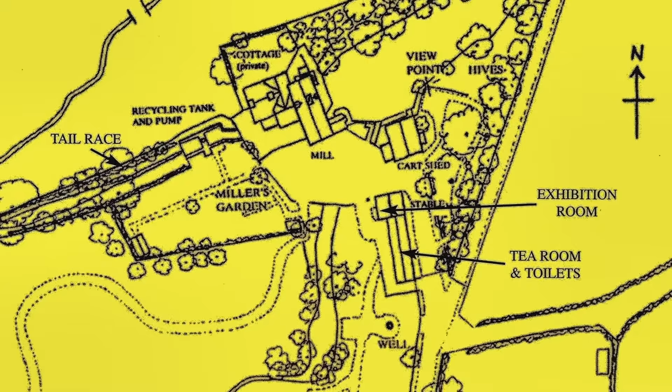New Hall Water Mill is situated in Sutton Coldfield, at the southern end of New Hall Valley, through which runs the stream now called Plantsbrook, formerly known as Ebrook. The mill pond was originally fed by this brook, but a continuous water supply was cut off in the 1960s, and the pond is now topped up using a holding tank.

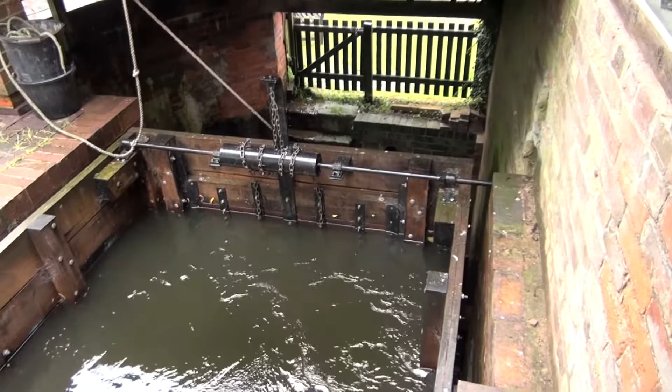The water from the pond enters a wooden pentrough before falling on the water wheel. The height of the sluice gate determines the amount of water that flows over the wheel and hence its speed. It is regulated by an interesting chain mechanism controlled from inside the mill. Here we can see where the axle enters the building, attached to a very simple but effective lever, which, when turned, raises or lowers the sluice gate.

Any excess water in the pond falls over a weir and returns through a tunnel to Plantsbrook. Looking over the railings in front of the water wheel housing, you can see the water coming under the sluice gate and falling on the wheel.

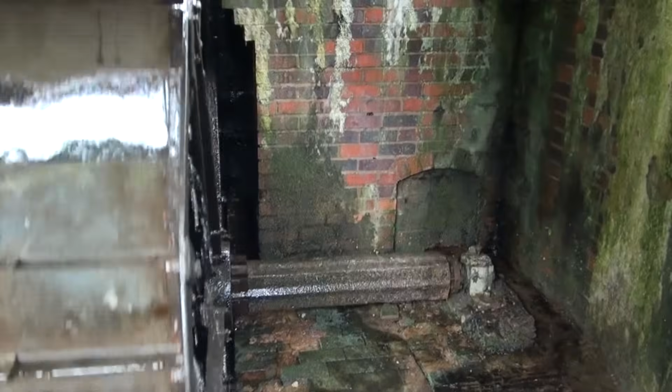As we enter the mill, we are greeted by a confusing array of rotating wheels and belts.

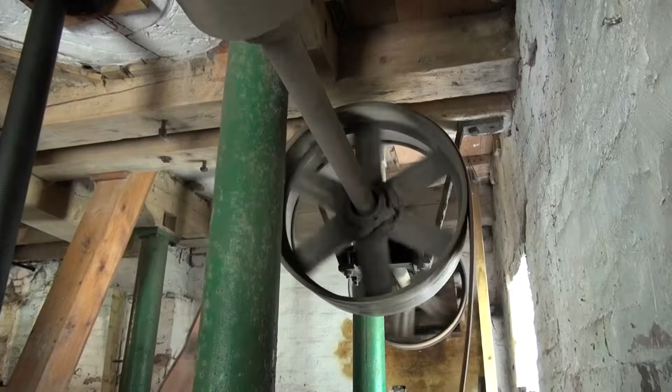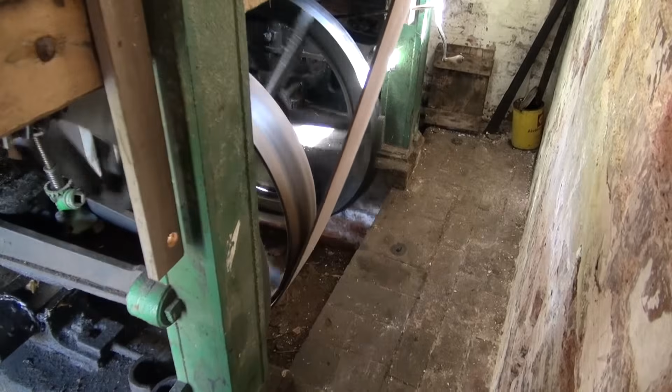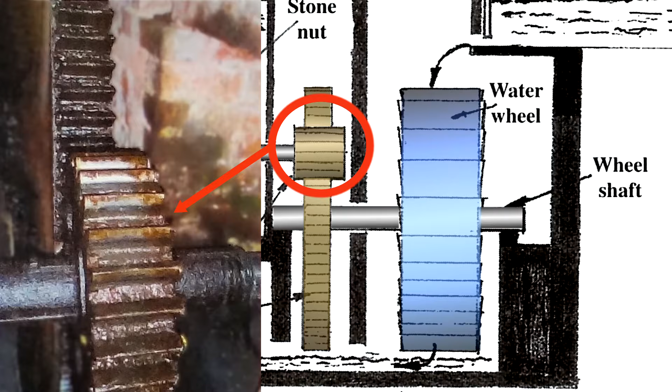Our first step in understanding how everything works lies in that opening on the left, where you can just see a moving gear wheel. This is where the shaft of the water wheel enters the building and is attached to the huge gear wheel called the pit wheel. The pit wheel engages with a smaller gear called a wallower, which is attached to the main axle in the building. Here you can see it rotating and turning the main axle.

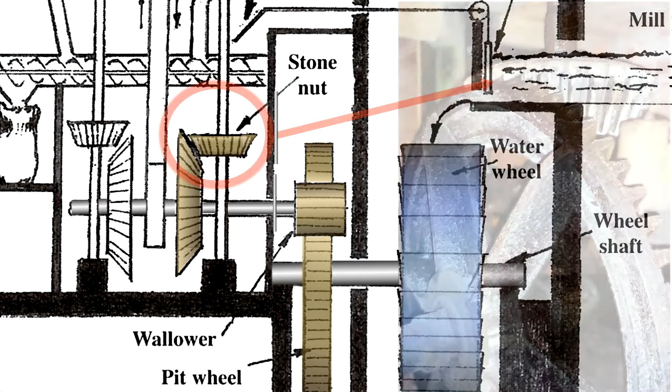In order to rotate the horizontal millstones, the power must be transferred to a vertical shaft. This is done using two beveled gears at right angles. The one in use can just be seen at the back.

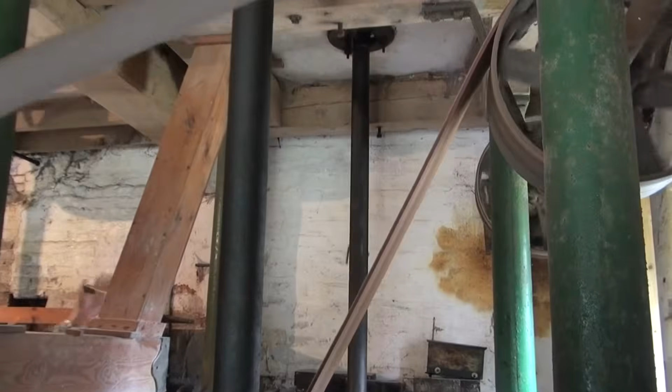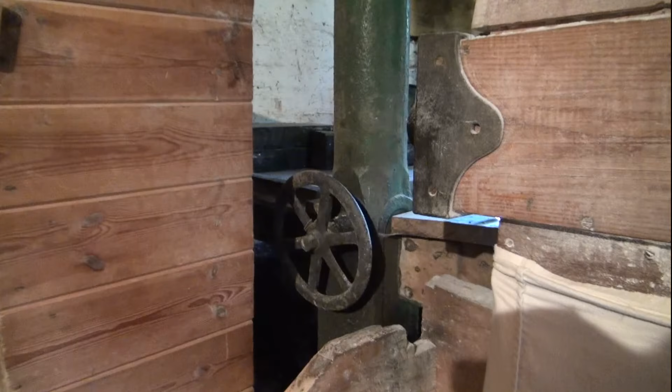There above is the vertical shaft that turns the millstones. It's got a piece of straw tied to it. That hand wheel is important and will be dealt with later.

But first we will turn our attention to the wooden chute down which the flour descends from the floor above. Behind it you can see a black rotating shaft which turns the millstone. You can see both of these on this diagram. The chute is in brown and the rotating shaft supporting the runner stone is in red.

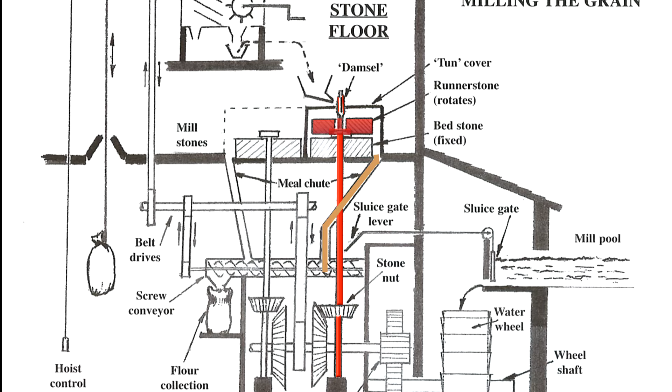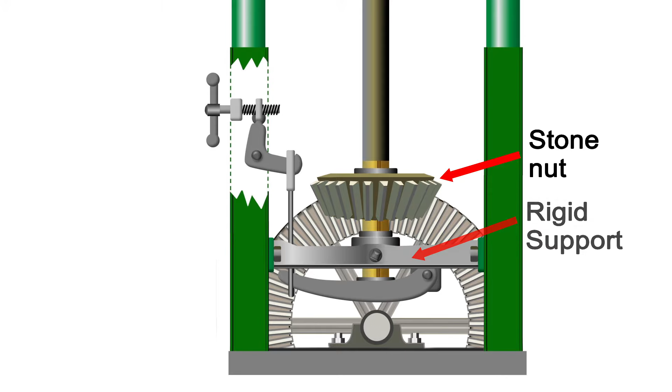That rotating shaft must be moved up or down in order to maintain the correct gap between the millstones. This is done using a mechanism called the tentering gear. The rigid support of the mechanism is situated below the beveled gear wheel, which is called the stone nut. The stone nut is on the rotating shaft that turns the millstone.

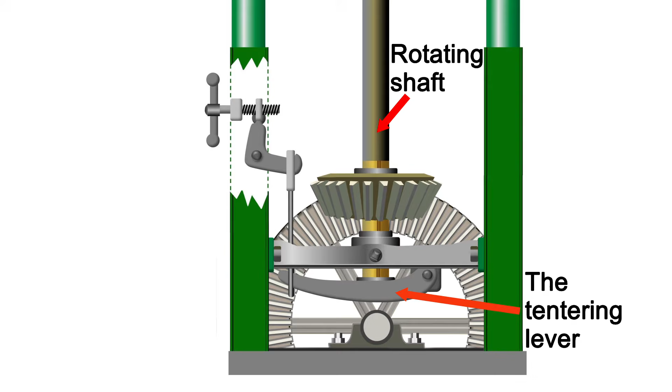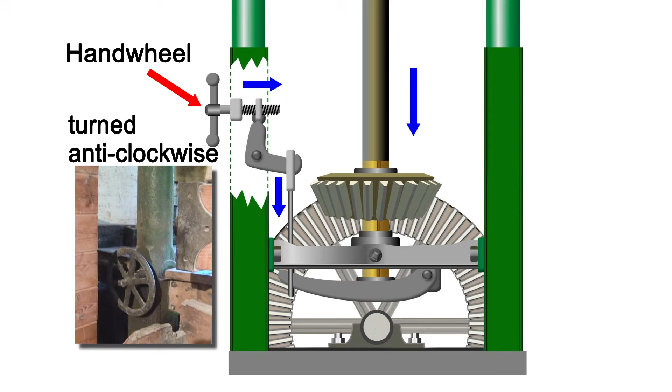The tentering lever below the support carries the whole weight of the millstone and the shaft. Rotating the hand wheel clockwise raises the lever and the shaft and so increases the gap between the millstones. As the millstones wear, the wheel must be turned the other way in order to maintain the right gap. The tentering gear that we can see is the one not being used.

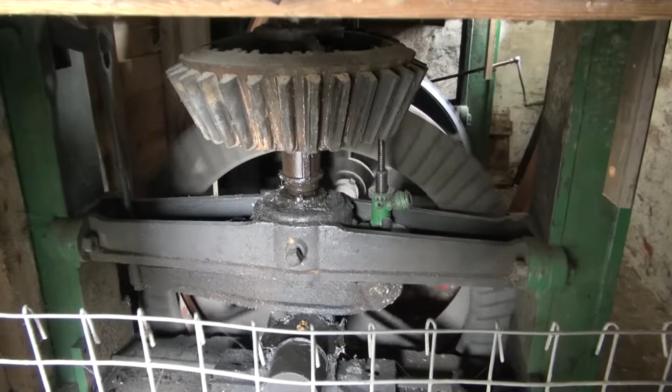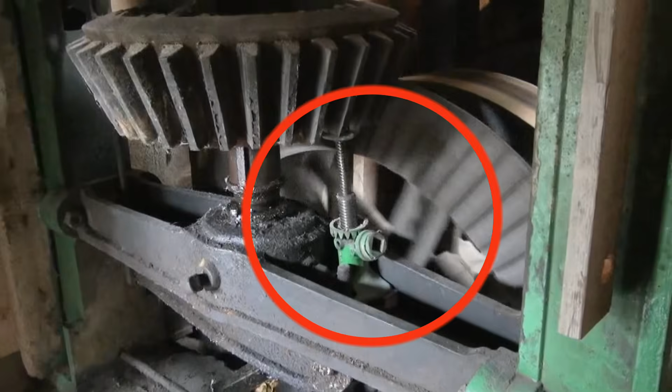If the shaft is raised a lot, the cogs will disengage. This mechanism, similar to a car jack, allows the cog to be moved up or down the shaft as required to maintain proper contact. In this picture you can see the link joining the lever to the wheel mechanism.

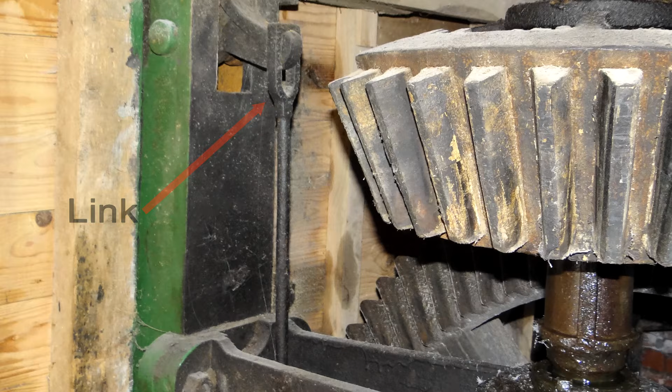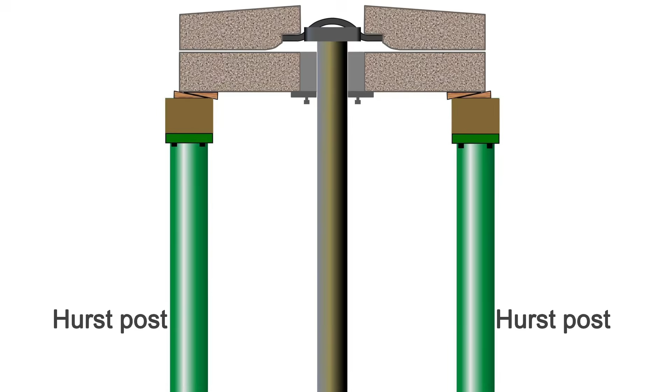We have looked at the ground floor. Now we must go to the floor above and look at the millstones. The Hurst posts support the fixed bedstone.

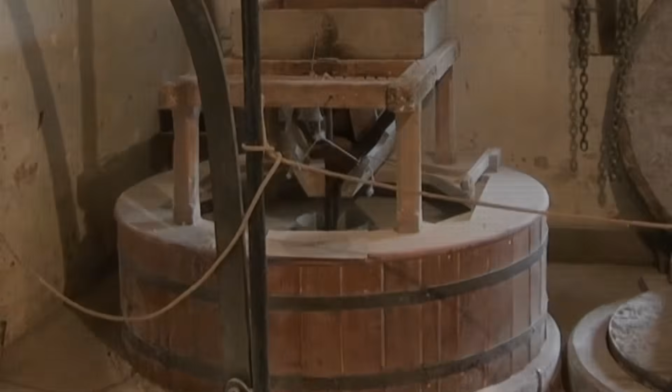The upper one is called the runner stone and rests on a piece of iron called a rind. This in turn is attached to the mace, which is attached to the rotating shaft. They are all enclosed in a wooden box called a tun. We shall return to the milling process later.

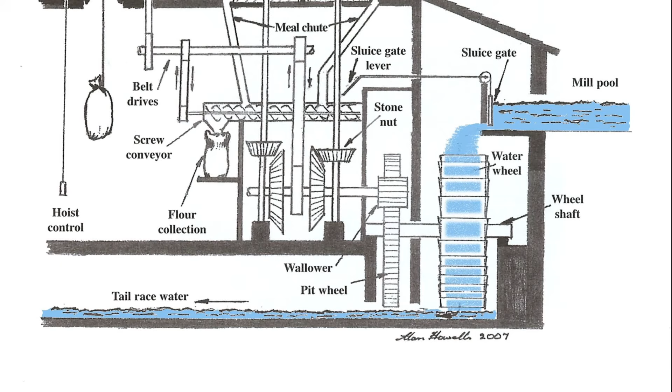First we will go outside and see how the mill pond is kept topped up. The water that comes from the water wheel enters the tail race and travels under the buildings to the holding tank. When the holding tank reaches a certain level, a powerful electric pump is activated automatically. This quickly empties the holding tank and returns the water to the mill pond.

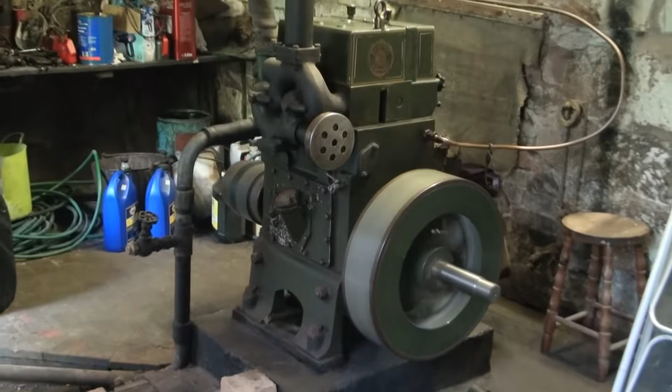The water wheel is not the only source of power. When the water supply became unreliable, the miller, Ben Davis, installed a diesel engine in 1949. The diesel engine runs two machines at the back of the building, a combined milling machine and the mechanism for the sack hoist. Let's follow the belts to the milling machine.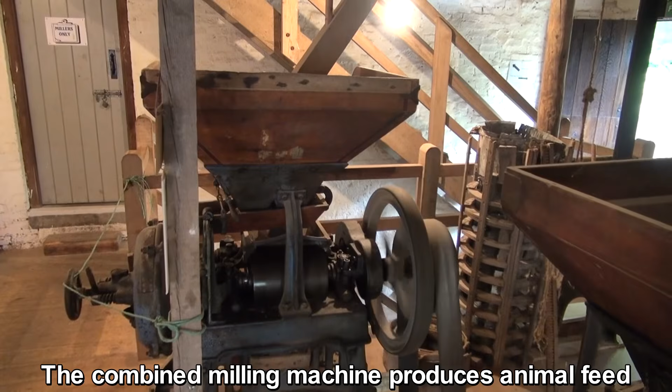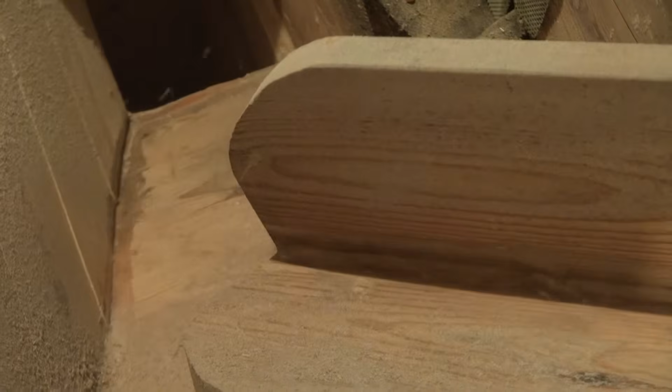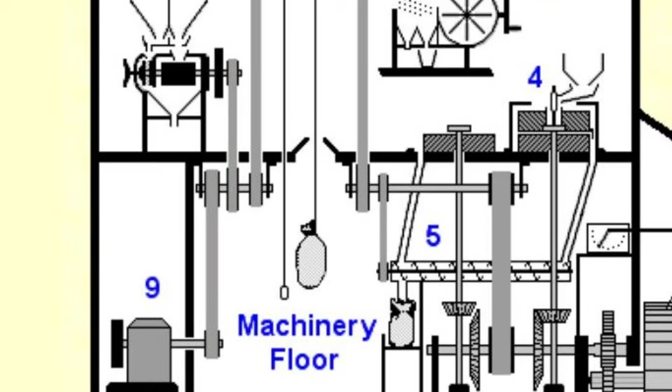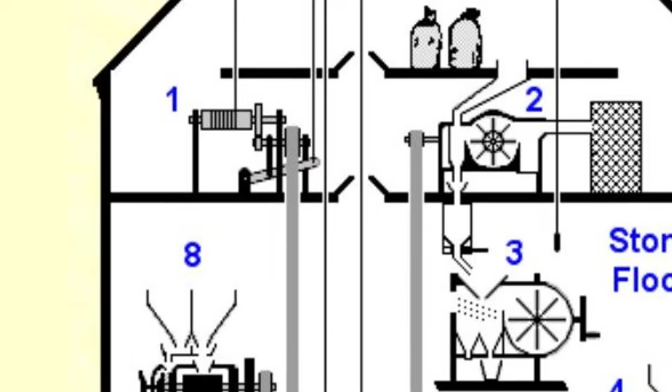We have seen how the diesel engine drives the milling machine, and now we look at the sack hoist. The mechanism is situated at the top of the building just below the garner floor. The grain arrives in heavy bags on the ground floor and must be lifted to the top floor where it would be stored. It will be hoisted up through a series of trapdoors.

The miller, working on his own, would count the number of clonks as the traps closed in order to tell when the load had reached the top. The hoist is controlled by a rope pull.

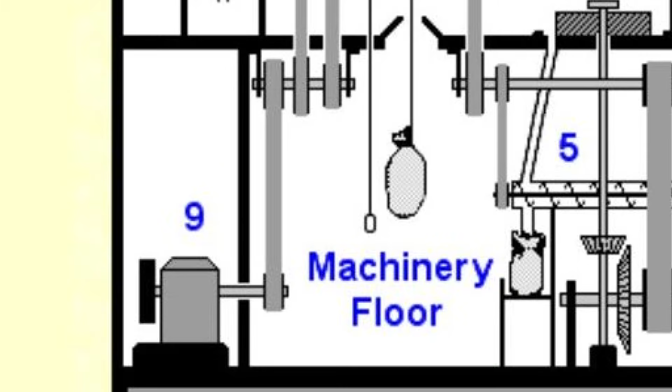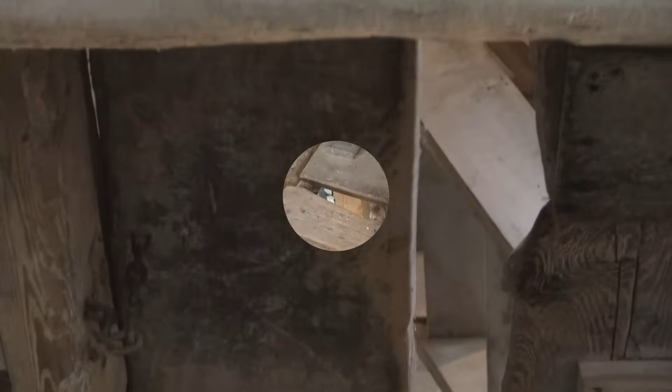The journey would start on the ground floor. Up there is the first trapdoor. The rope pull goes right up to the top floor. This is the first trapdoor from above, and there is the rope pull beside it.

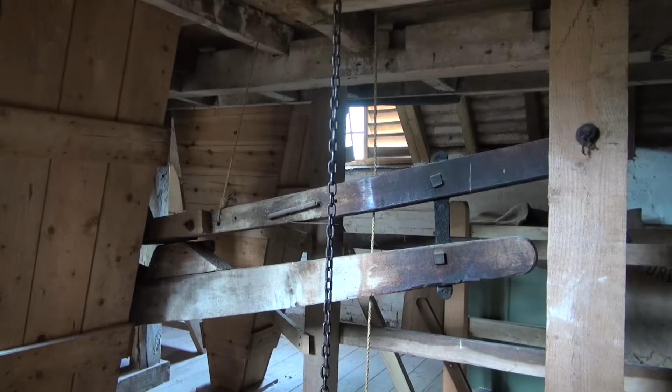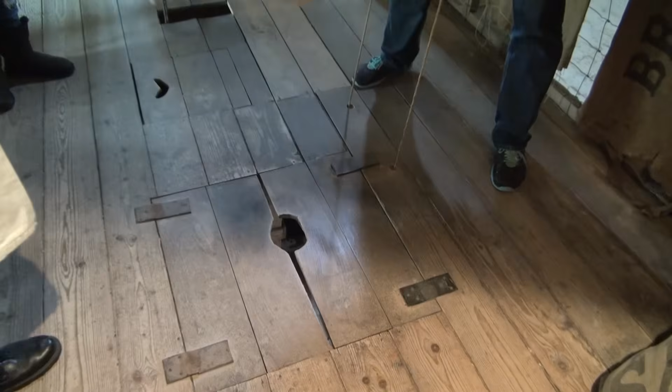Pulling the rope activates the winding mechanism. Here are the levers that operate the clutch. The drive from the diesel engine rotates continuously, but only activates the drum holding the chain when the levers are pulled upwards.

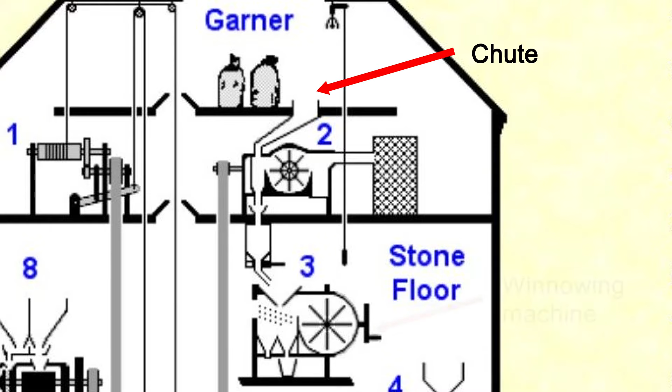In the past, as many as 50 sacks of grain were stored on this garner floor. From here the grain is poured into a chute which feeds the hand-operated winnowing machine. On the way it passes through an aspirator where the dust is blown away. This machine is driven by the water wheel.

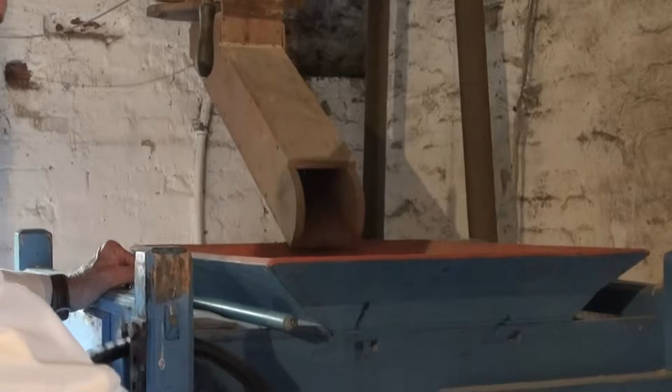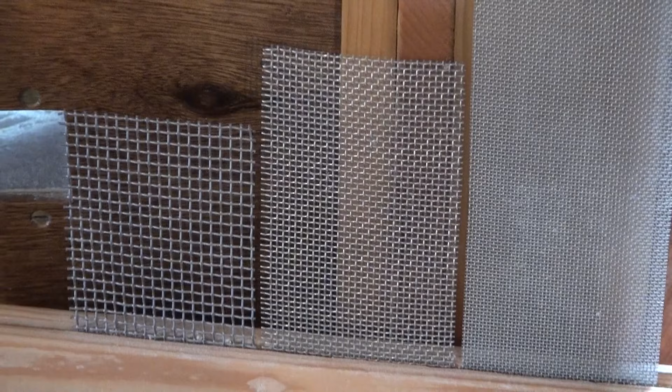All the way down. The winnowing machine has a series of meshes through which the grain is forced. This results in unwanted rubbish, like odd stalks, being removed.

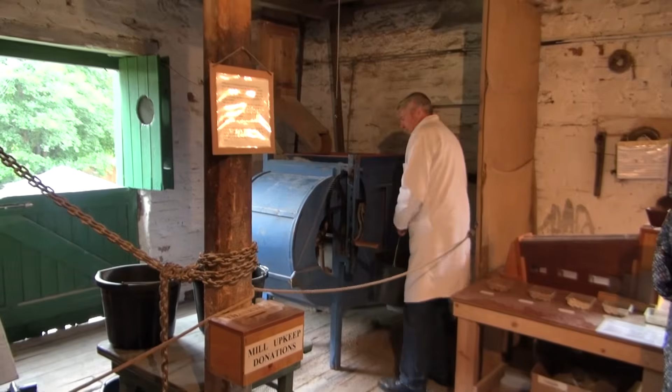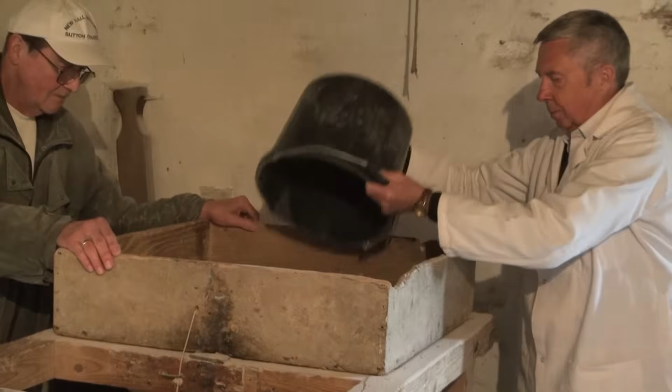When processed, the clean grain can be ground into flour. Before windmills and watermills, the grinding of corn into flour was done by hand using a rotary quern. In many parts of the world, such methods are still used.

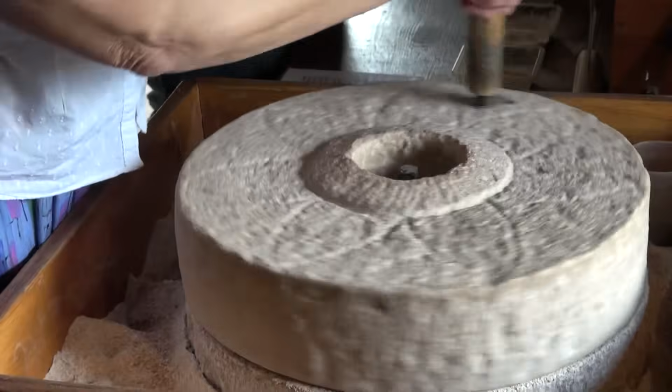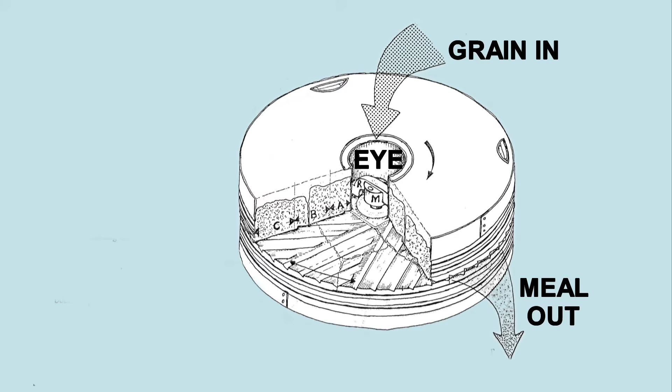It's now time to look at the grinding process. The grain enters through the eye, is crushed between the millstones, and emerges at the edge as meal, which collects in the tun and drops down a wooden chute to the floor below.

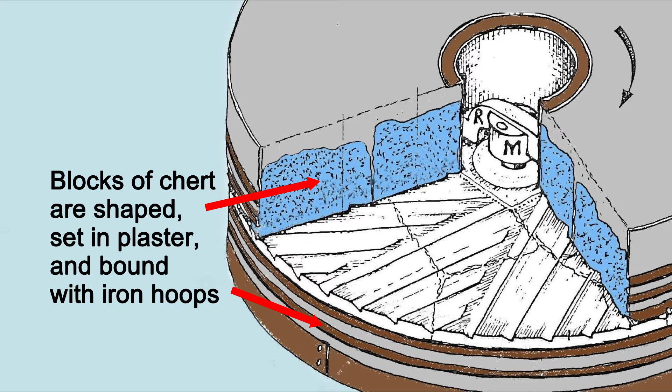The best millstones come from France and are made up of blocks of chert which have been shaped and set in plaster. The surface of the millstone is divided into furrows and lands.

This picture of an old millstone shows the blocks of chert. On it you can see some furrows and the fine grooves on the lands called stitching.

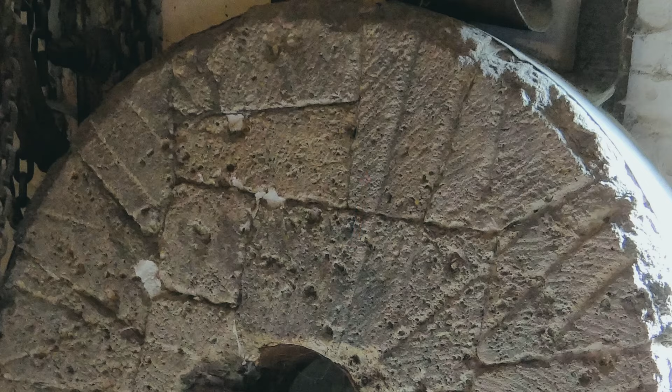The number and design of the furrows is important. They are designed to move the grain from the eye to the edge of the stone, and at the same time force them up onto the lands where they are crushed and ground into meal.

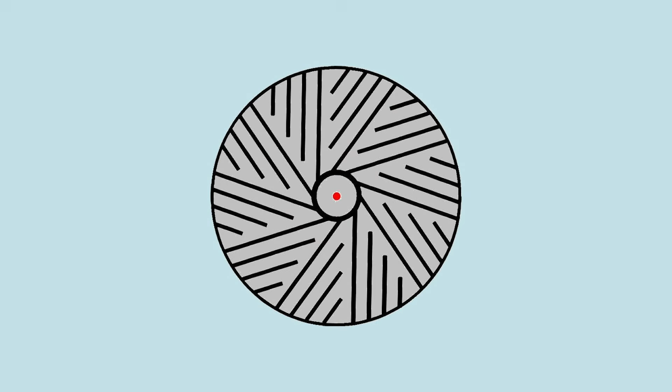You can see the overall pattern in this diagram of the bedstone. The runner stone has exactly the same pattern, but when turned upside down will have the furrows in the opposite direction, so that when it rotates, the action is that of many scissors.

Having looked at the millstone, we now turn our attention to the wooden structure above, which is called the horse. We have already seen the clean grain being tipped into the hopper. From there it drops into the shoe and is directed into the eye of the millstone.

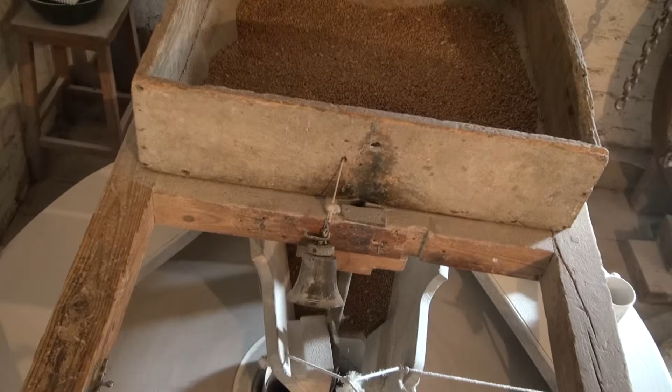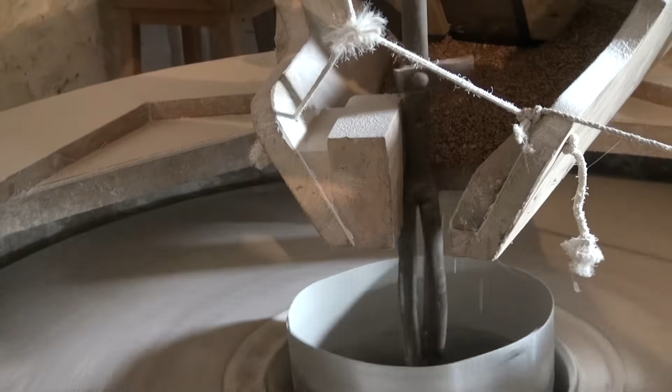To keep the grain moving, the shoe vibrates. This is done by means of a rotating piece of metal called a damsel. The tension on the shoe is maintained by means of a piece of string attached to the miller's willow, which acts as a spring.

The rate at which the grain is fed into the eye is controlled by the angle of the shoe. From the tun, the meal falls through the wooden chute to the floor below, where the miller can examine the flour and adjust the gap between the millstones if necessary.

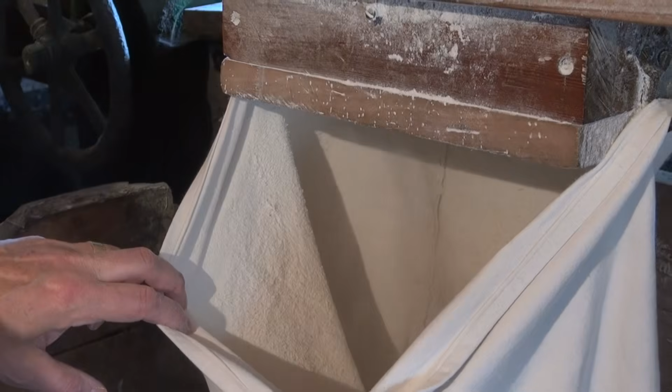Millstones need regular maintenance. To do this, the tun must be removed and the runner stone lifted and turned over. Not an easy task when the stone weighs some 3/4 of a ton.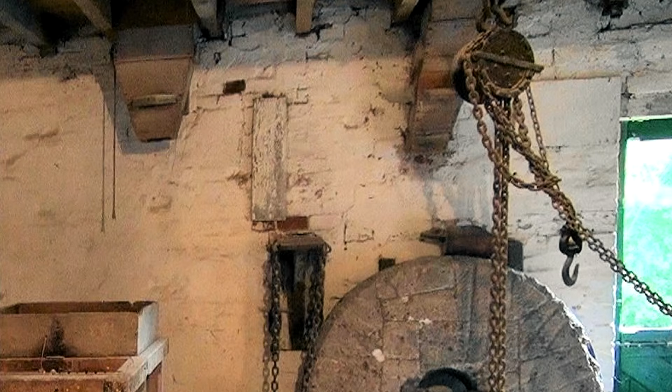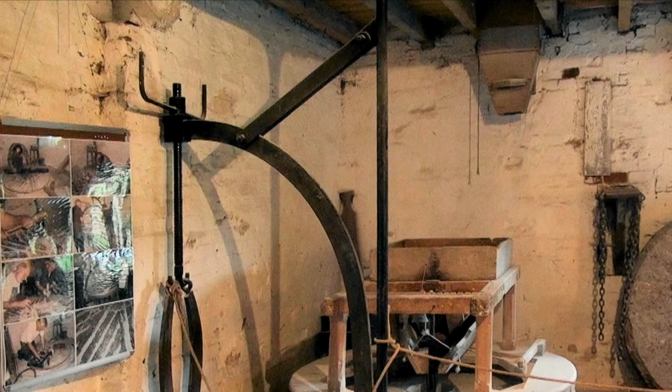In the past this was done using a block and tackle attached to a roof beam, but this was deemed unsafe for today and a special stone lift is now used. To the left of the picture you can see a display of photographs showing the work being done.

At top left, the stone is being examined for any high spots. These must be hammered away. The process has to be done several times.

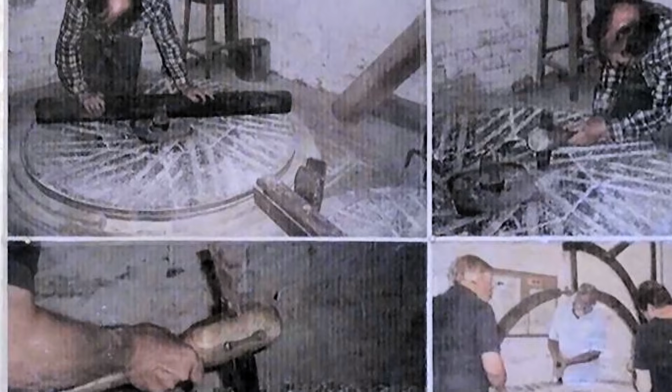The furrows then need to be deepened. Finally, the lands must be stitched, that is, fine lines chipped into the surface. This is done using a mill bill, a double-edged piece of toughened steel set in a wooden handle called a thrift. In the bottom left-hand corner, you can see a millstone dressing machine being used.

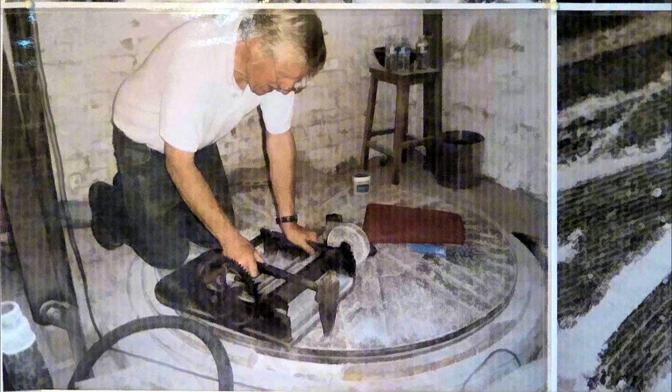Here are all the tools on display.

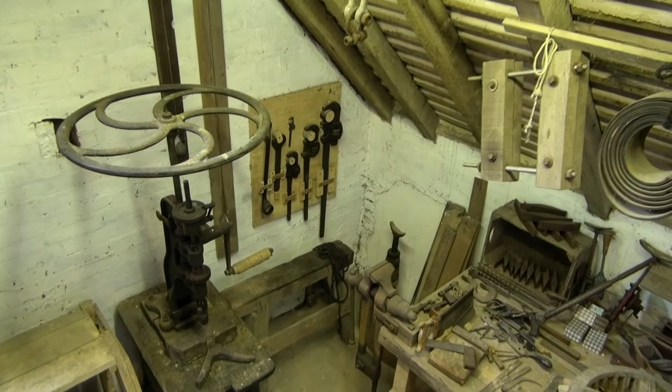The miller had to be able to do most of the maintenance of the mill by himself. He could not afford to wait for somebody to come out and fix his problem. Here we see a reproduction of a typical miller's workshop.

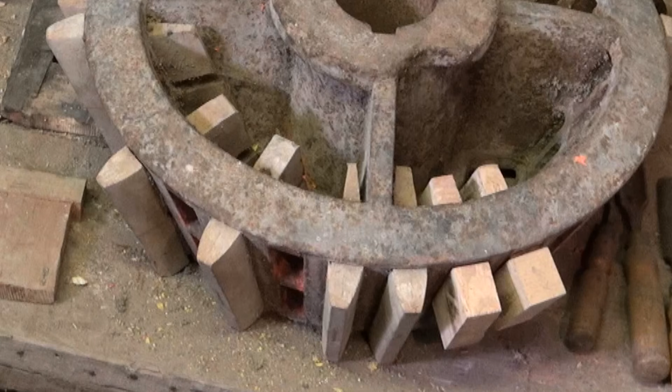In the centre you can see the wooden teeth of a gear wheel being replaced. On the other side is a mixture of tools needed for the maintenance of the house and grounds. In the centre you can see some large pliers. These were used to stretch the leather in shoes in order to accommodate bunions.

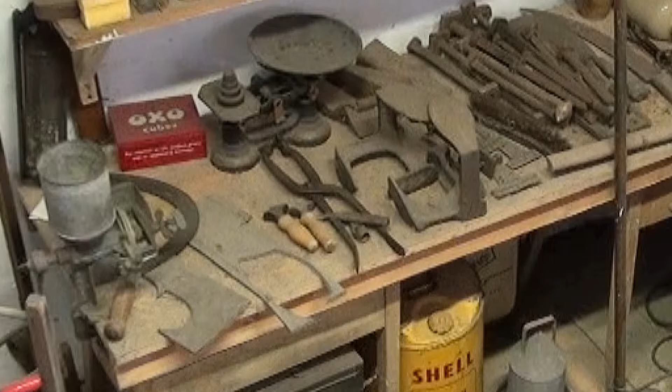There is much more that could be said about the mill and its open days, but that will have to wait for another occasion.